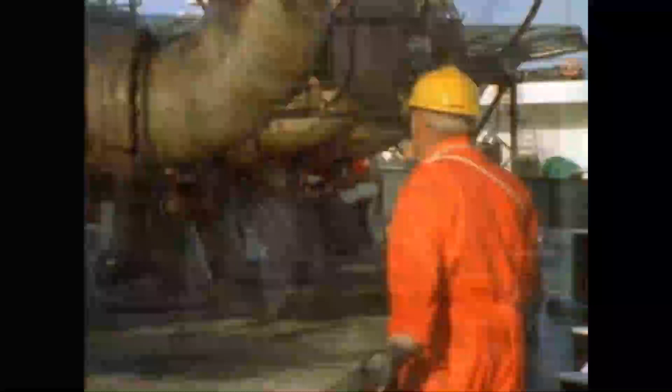All hydrocarbons, whether crude oil or products, are flammable. The reason for the existence of an inert gas system is to prevent fire and explosions. In other words, safety—safety for all those sailing and working on the ship.

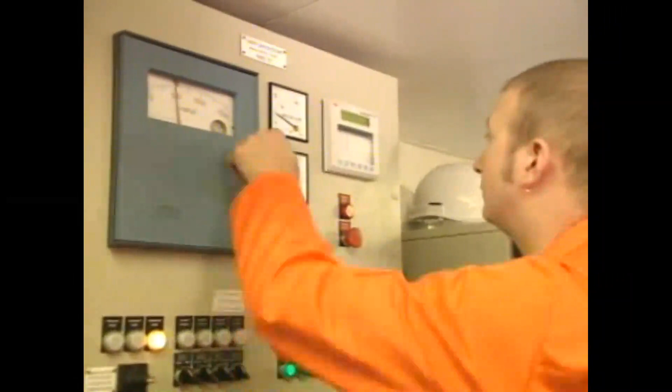To be certain that this safety is sustained, proper procedures are essential all the time. This training package is intended to amplify and emphasize your own training and the material in your ship's inert gas or IG manual.

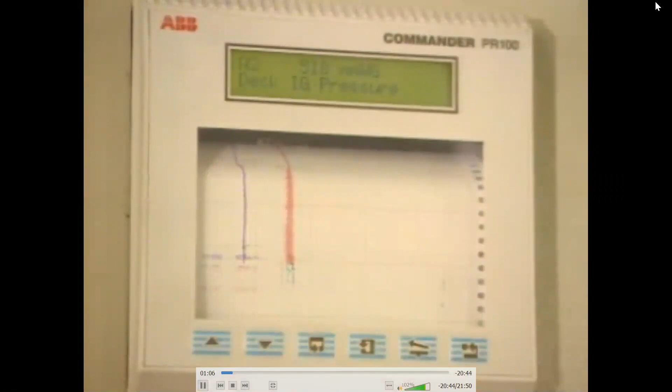Complete knowledge of this is vital to all deck officers on tankers. The importance of the IG system is reflected in the way its operation is established in international conventions.

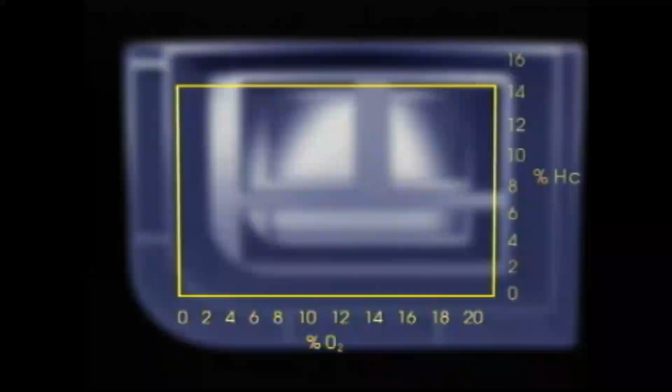The idea behind inerting the tanks is to make fire or explosion impossible because the oxygen level in the tank atmosphere is too low. If we compare the percentage of oxygen in the air with the percentage of hydrocarbon gas, fire is only possible under limited conditions. Outside these, there is either too little oxygen, or too much or too little hydrocarbon gas for ignition.

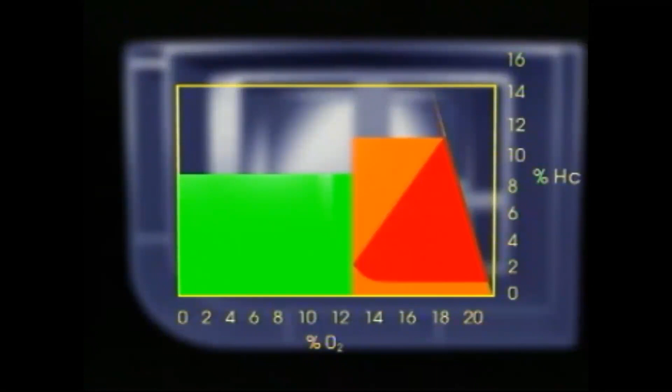So the percentage of oxygen is crucial to give a good safety margin. The maximum permissible percentage of O2 in inert gas is set in SOLAS at 8% or less for older ships, and 5% for new ships. Some terminals require levels of 5%.

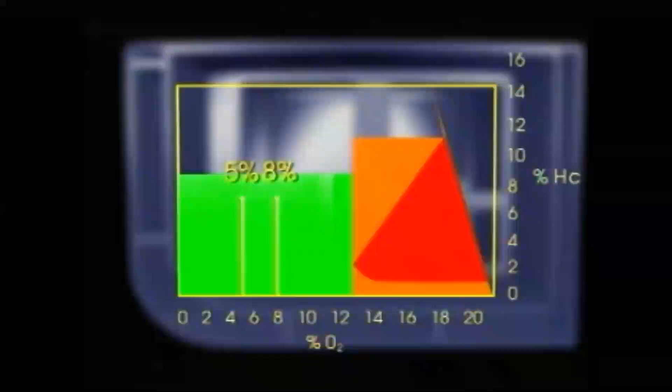The inert gas pressure must always be positive to ensure that air does not penetrate the tanks and increase the oxygen level.

The generation of inert gas starts with either the exhaust flue gas or gas from an inert gas generator—the smoke from the boiler, starting from the engine, through each stage of the process.

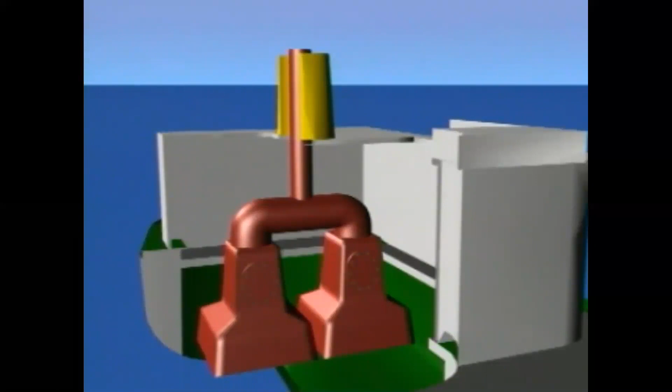This gas has been used for combustion and its oxygen content has been reduced to 5% or below. The gas goes via the uptake valve to the scrubber with its seawater cooling inlet and outlet.

Inside the scrubber, the hot gas is sprayed with water. It is cooled and most of the soot and sulfur dioxide are removed. The gas passes through a demister to remove as much of the water as possible.

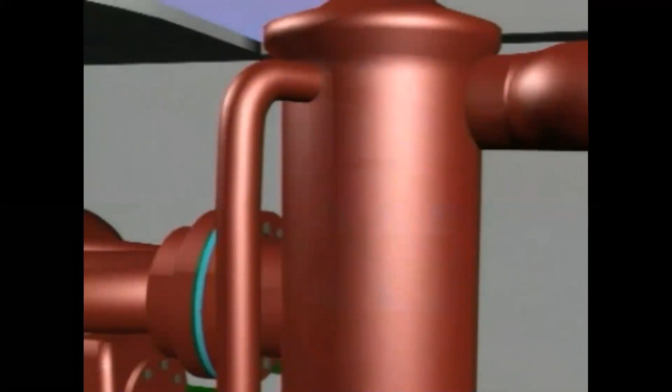There are blower inlet valves before the main IG supply fans. To ensure correct pressure, there is an automatic pressure regulating control valve. Finally, there is either a funnel vent to atmosphere or a recirculation valve and line. These are used to vent or recirculate gas after starting until oxygen content and gas flow is steady.

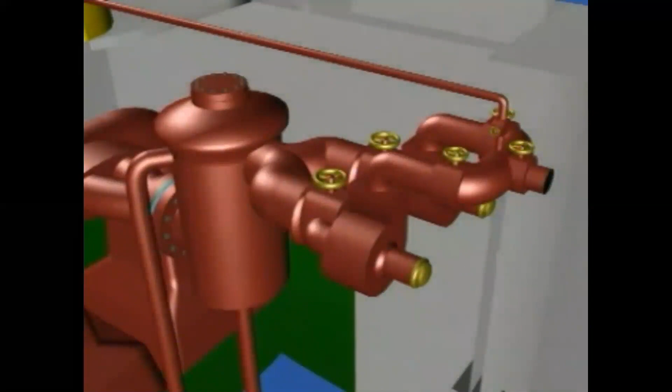Most important are the fixed oxygen analyzer and pressure recorders.

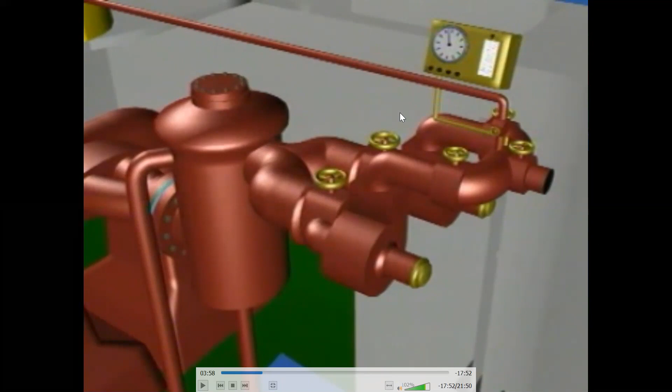Alarms will be fitted to the scrubber to show low water pressure and high water level, to the supply fans to show if they malfunction, after the fans to show if inert gas temperature is too high, and to the oxygen analyzer and recorder to show if the oxygen content rises above the required maximum.

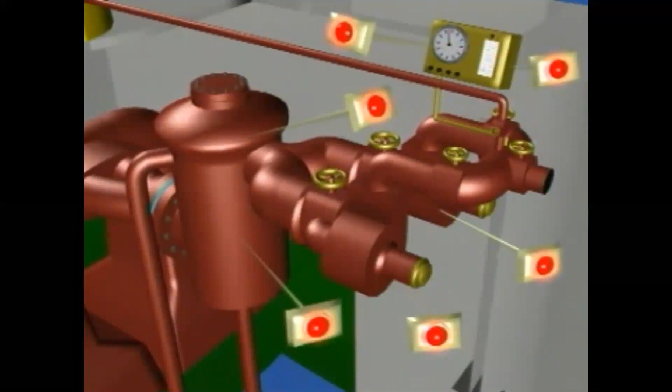Finally, an alarm shows if there is power failure to the oxygen analyzer and gas pressure regulator.

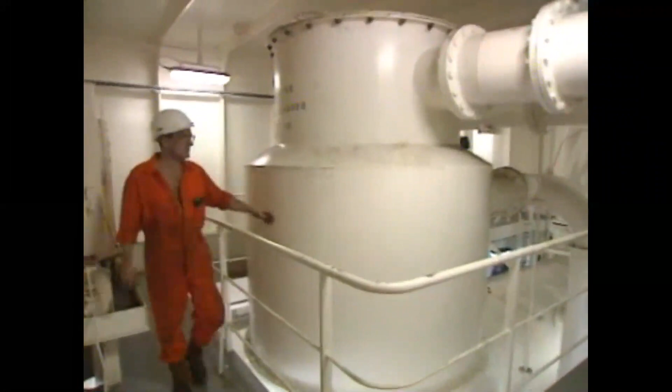A well-run system will provide inert gas with oxygen below 5% that is cool and is free of solids and the worst corrosive gases.

Once the gas has been generated and cleaned, it needs a delivery system, and that's what we're going to look at next. After the pressure control valve,

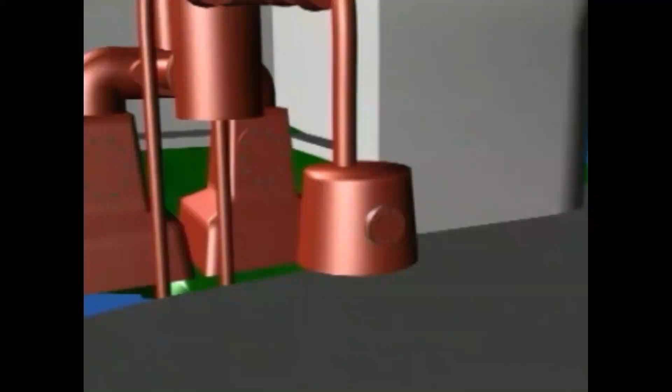comes the deck water seal. This prevents gas from the tanks, which will usually contain hydrocarbon vapors, from entering the engine room spaces.

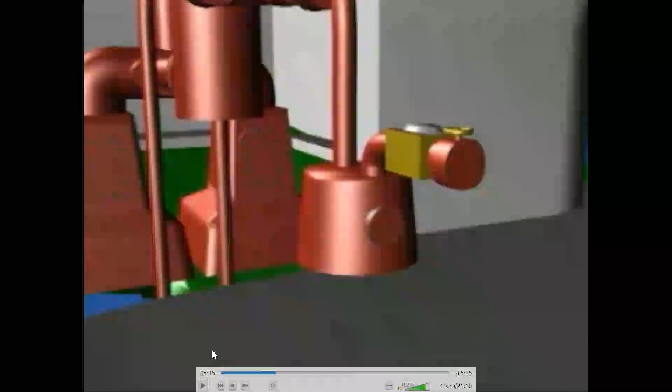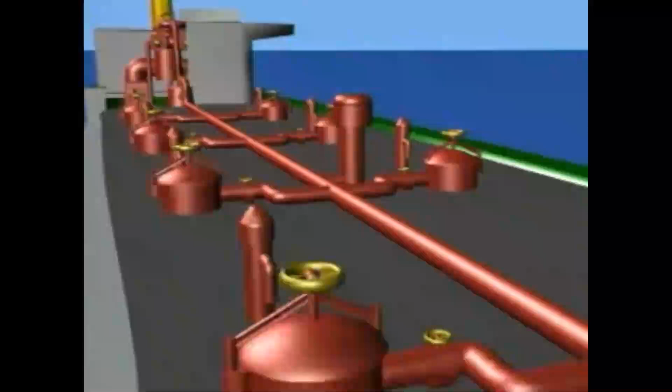The gas enters the deck main. There is pipework to deliver the gas to the tanks. On the deck main, there is a pressure vacuum breaker to ensure that excess pressure or vacuum will not damage the tanks. Finally, there are 1 or 2 mast risers for venting to the atmosphere.

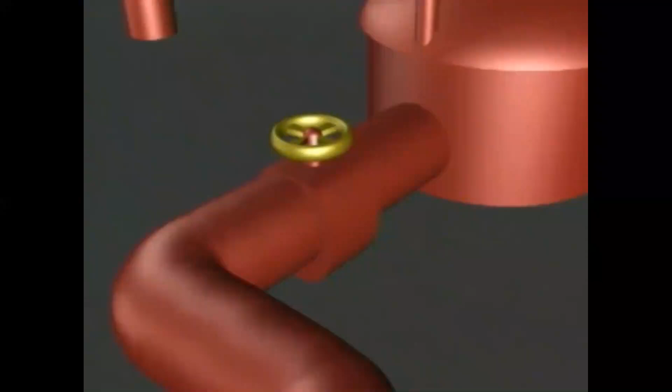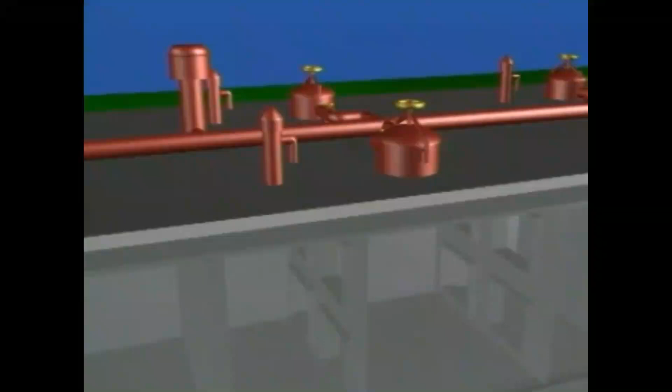Generally, each tank will be fitted with a tank isolating valve. Each isolation valve must be fitted with a locking arrangement. Each tank will have either a full-flow individual pressure vacuum relief valve or a breather valve, or an electronic pressure sensor. This is to fulfill SOLAS requirements for full-flow vapor relief or pressure sensors to provide secondary protection against over or under pressurization.

Immediately after the non-return valve is a pressure sensor and recorder with a high-pressure alarm. A further alarm is fitted which activates if the power supply to the pressure sensor fails.

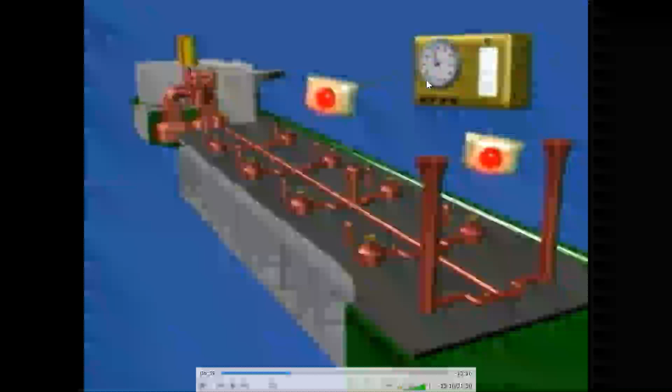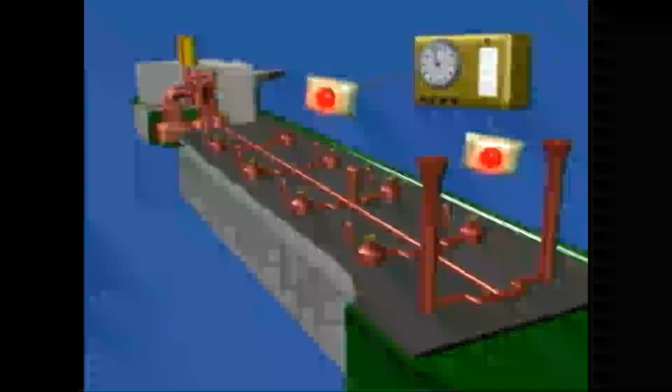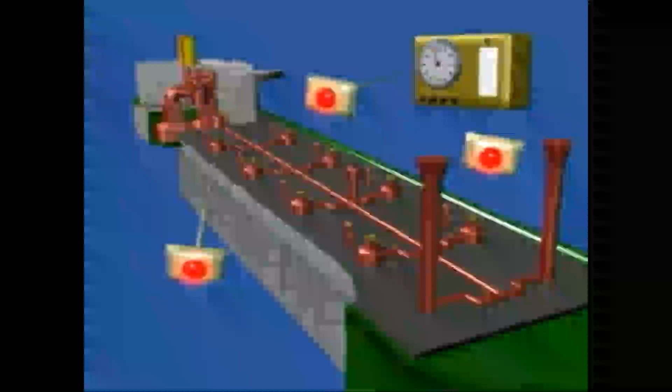Wet type deck seals will be fitted with a low water alarm. That then is the entire system.

Now we shall examine how it should be started up before examining its use during different cargo operations.

First, the delivery side. It is important to give plenty of notice to the engine room. Hello engine room, deck officer here. If you could start the IG system please.

They may have to create sufficient load on the boiler to ensure that the boiler will deliver flue gas that will have a low enough oxygen level. If there is an inert gas generator, this will have to be started.

Good communication between the deck and engine departments is needed to ensure that soot is not generated during IG operations. The deck department must not rapidly change the boiler load, and the engine department should not soot blow.

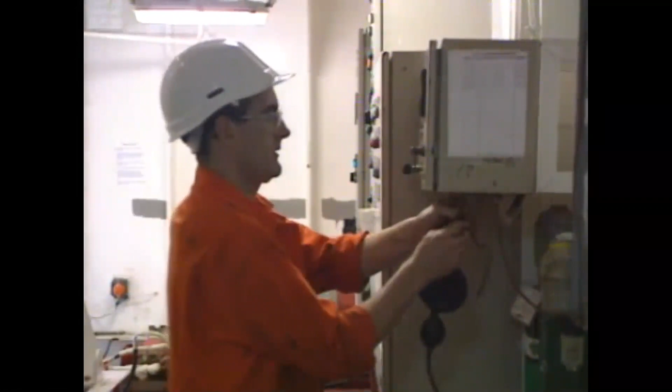Both departments need to go through their checklists before the system can be used. The oxygen analyzer must be checked and calibrated.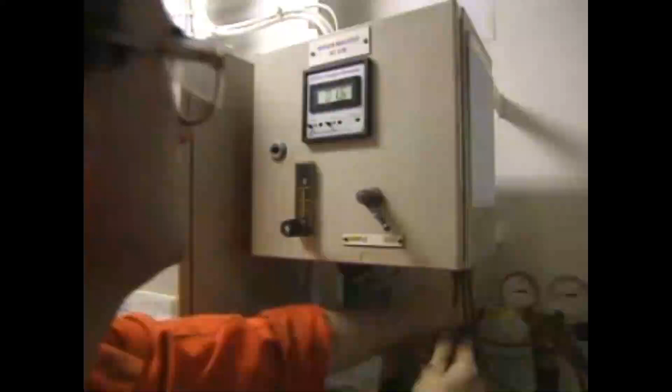The scrubber needs particular attention. Water must be started early to the scrubber to ensure that the internal surfaces are wet. The water flow should be checked before the flue gas can be connected to the system.

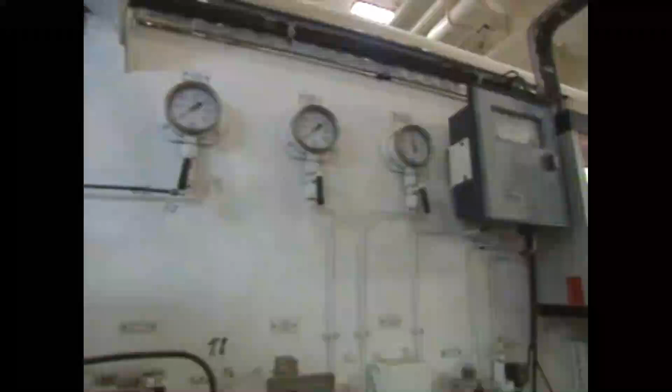When the gas enters the system, it will at first be operated with either the recirculation line or funnel dump line open. While this is happening, a tour of inspection should be made, checking the scrubber for hotspots, and ensuring again that inlet and outlet water are flowing correctly and the alarms are operational.

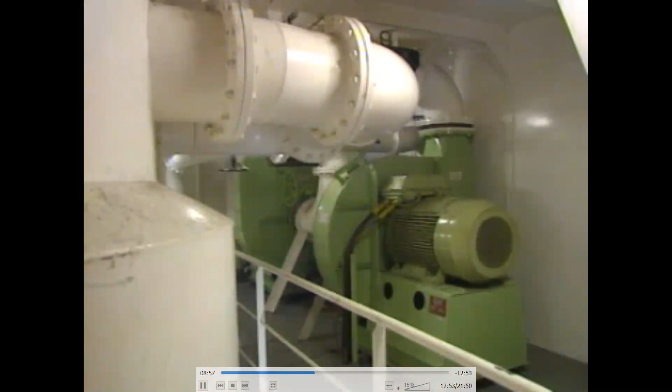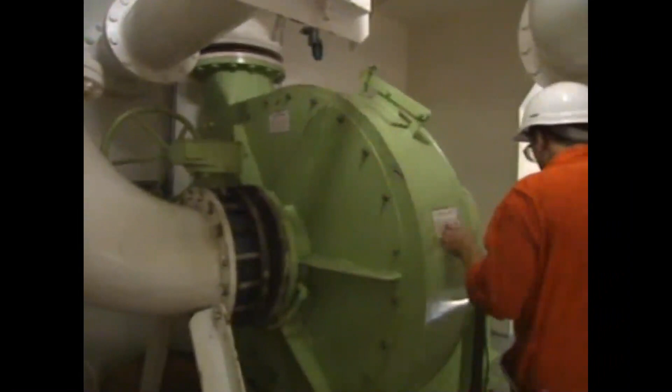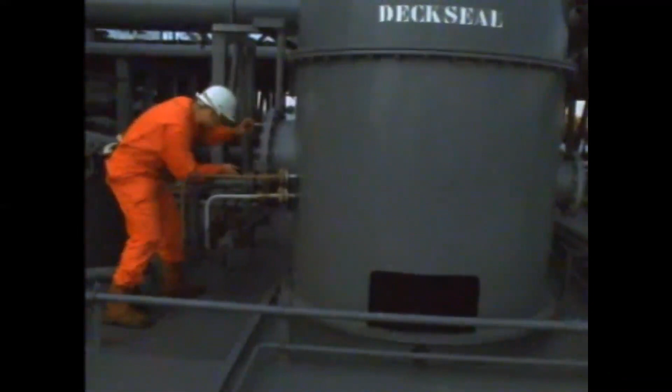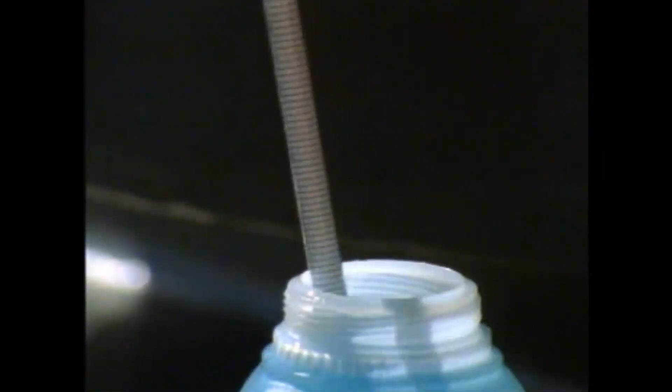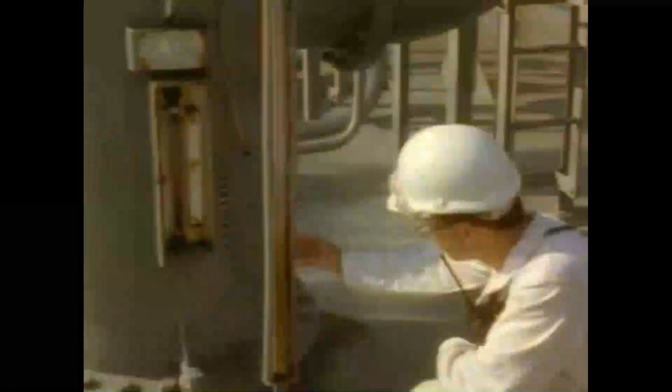In cold weather, glycol may have to be added to the water, so the water may need to be checked for level and density. Like the deck seal, it is operational all the time, not just when the system is running.

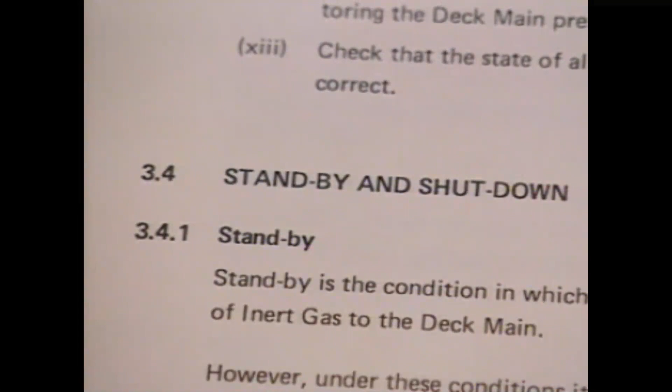Following the correct sequence is important both in starting up and in closing down the system. Follow to the letter the correct procedures in the ship's inert gas manual.

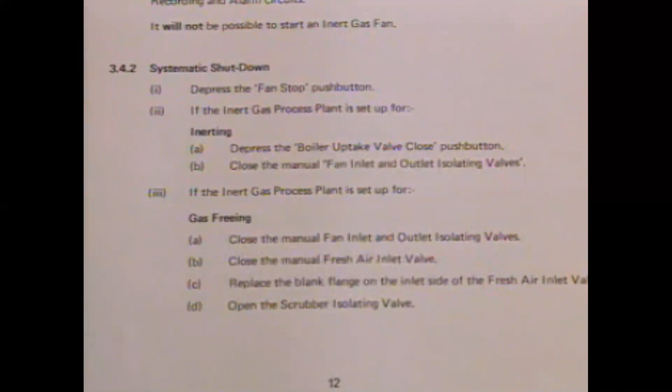Note that at the end of operation, the scrubber water should be run for at least 1 hour to ensure that all the corrosive residues are washed out of it. Maintenance of this part of the system is extremely important, as the internal environment is very corrosive.

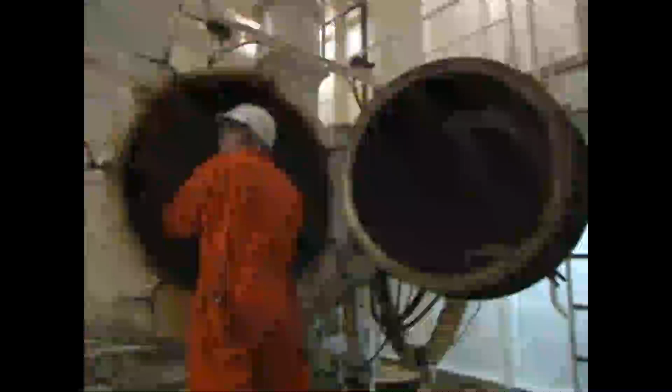Maintenance of the IG system is a crucial part of maintaining the ship's operational capability. This will usually be done on the ballast passage.

The lines should be pressured and checked for leaks. The deck water seal, the non-return valve and all PV valves need to be checked regularly to ensure that corrosion has not affected their operation.

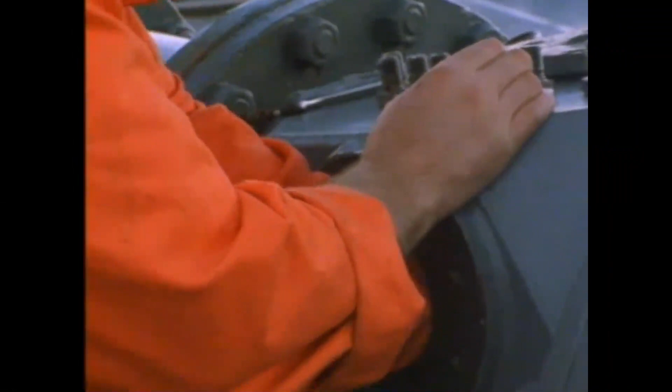The ship's planned maintenance program will tell you how often this needs to be done. Make sure you do it thoroughly.

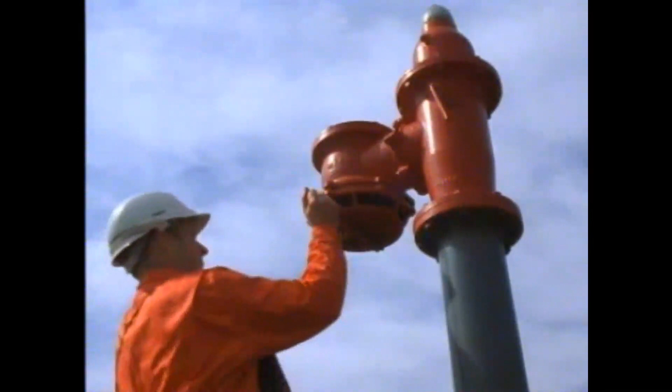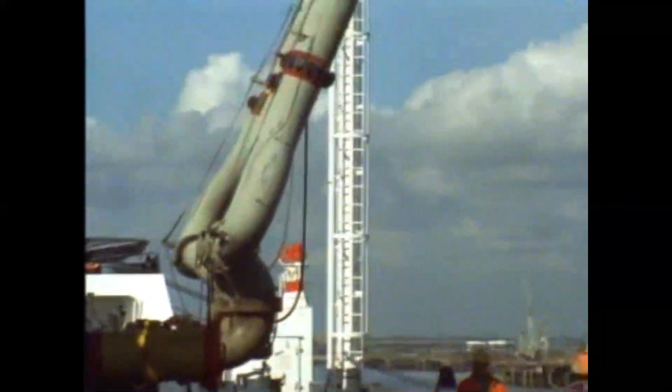Now that we've looked at the inert gas system itself, let's examine in detail how it's used during the ship's different cargo operations, starting with loading.

During loading, the inert gas system is normally not required. The mast riser valve, if fitted, needs to be in the open position.

If the terminal prohibits release of vapor to the atmosphere, all vapors must be returned ashore using a vapor return line.

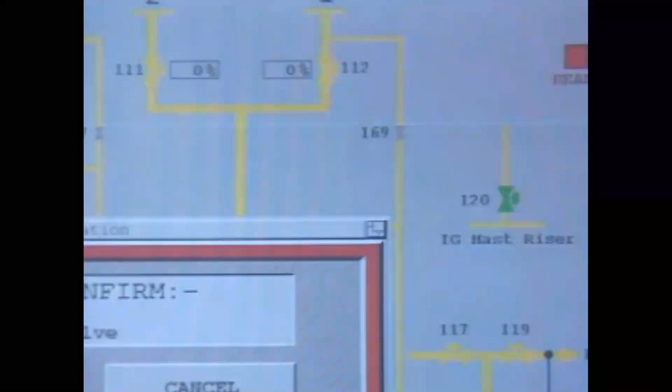After loading, it is vital to remember to return the mast riser valve and all vent valves to the normal closed position.

During the loaded passage, the pressure must be maintained within the designated pressure range. Early in the loaded passage, vapor release can make it too high. The tank PV valves are designed to deal with this by allowing venting to atmosphere.

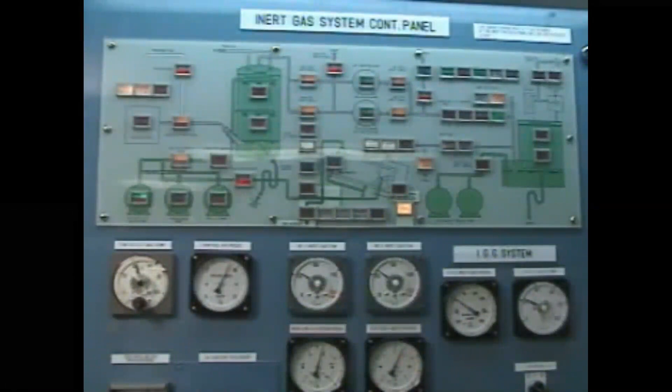Movement of the cargo in heavy weather can have the same effect. In some conditions, venting during the day as the temperature rises may mean topping up with inert gas at night when the temperature falls. The IG pressure must be monitored throughout the voyage to ensure it does not become too low.

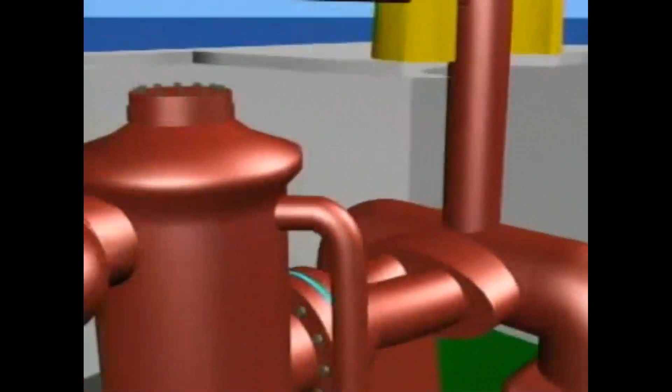It is during the discharge that the inert gas system is most important. Its correct operation is vital to the entire procedure.

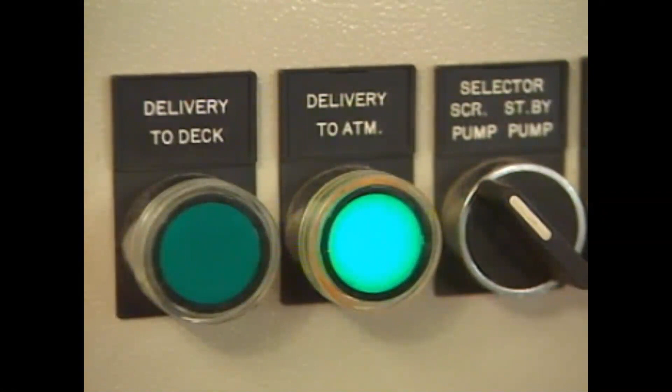Before the discharge begins, the system must be run up and checked. At first, the system is operated either with venting or on recirculation. It must not be run for long on recirculation, as the temperature and oxygen content of the gas may increase.

Before gas is delivered to the tanks, the system must be allowed to stabilize and the pressure set in the cargo control room.

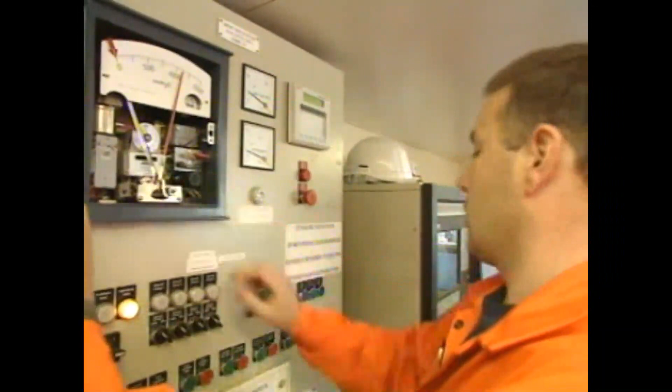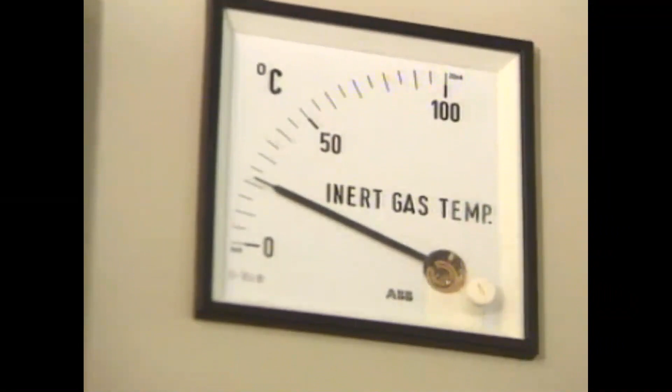Air control, that's 1, 2 and 3 manifold fully open now. I have a cargo handling plan for you. Yes, the captain gave me...

There will always be a lull while the safety checklist and cargo matters are sorted out. Once these have been agreed and there is positive IG pressure, the discharge can begin.

That's 1348, commence discharge. Hello deck watch, if you can have a check round on deck please and check the offshore manifold.

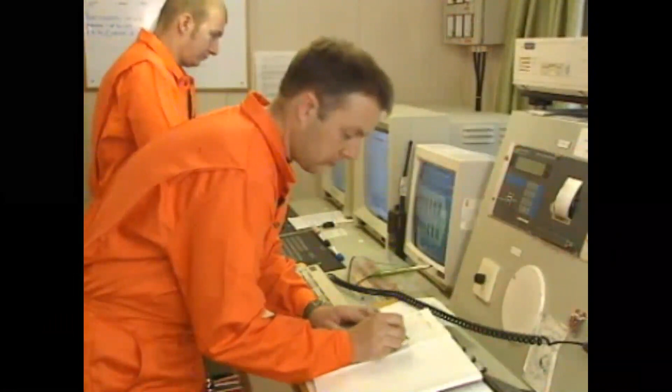As the ullage is small at the start, the correct pressure will be reached quickly. Then there will be a period of adjustment as the inert gas supply adjusts to the rate of discharge and the increasing tank space above the cargo.

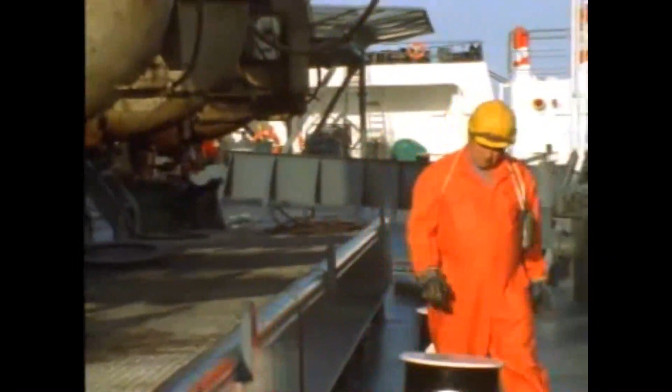The deck crew needs to monitor the IG system throughout the discharge. If the system fails, cargo discharge will have to be stopped. If the IG pressure falls, then cargo pumps will need to be slowed.